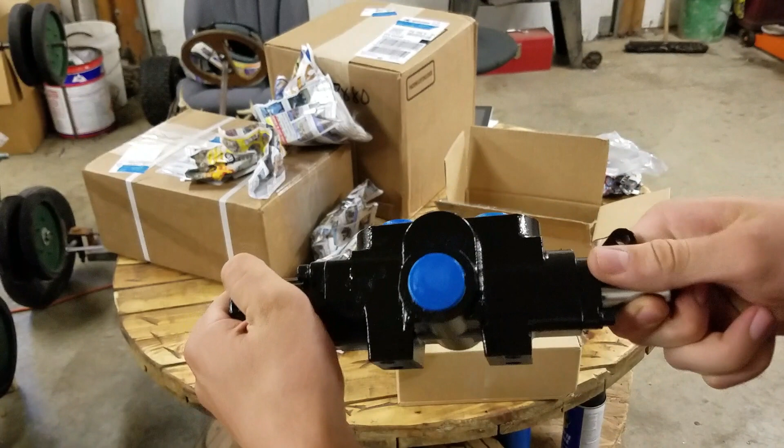Alright, so this is the valve here. I don't know exactly what all these ports do, I'll figure that out, but I do believe this has a relief set into it.

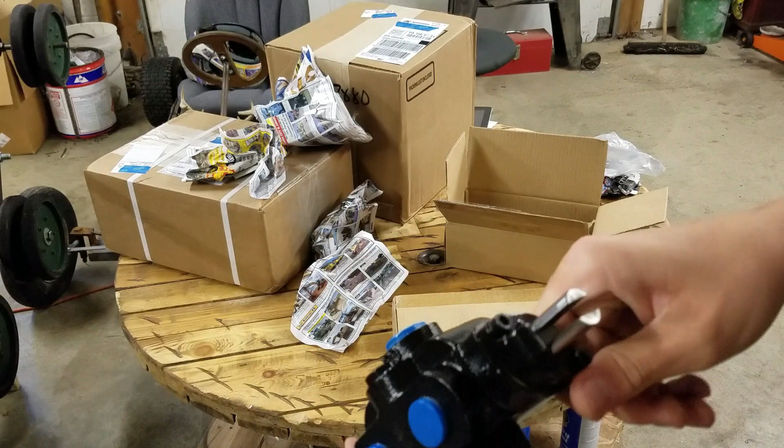So that's the valve, I've got two of those. They'll control the direction of flow of the hydraulic fluid to the motors from the pump.

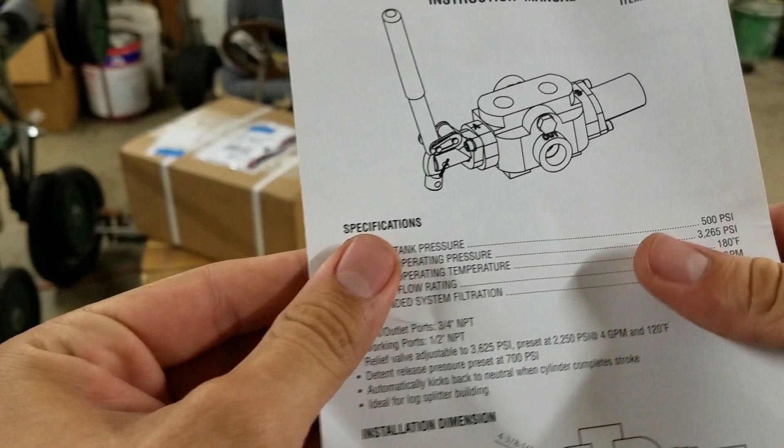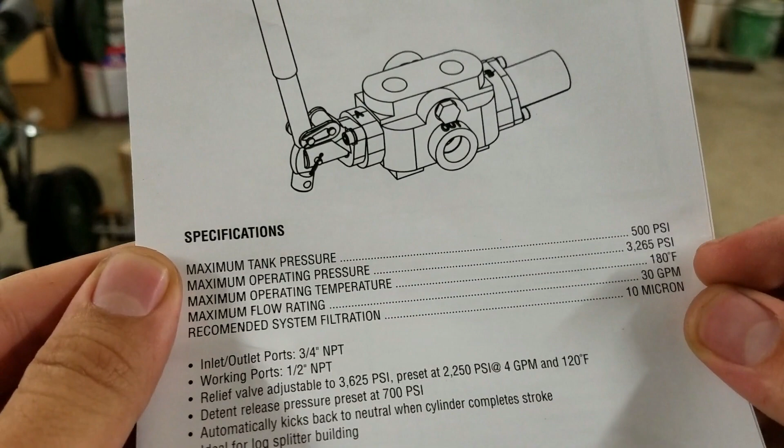Just looking over the sheet that came with the valves, some of the specifications here: maximum operating pressure is 3200 psi, temperature 180 degrees Fahrenheit, maximum flow 30 gallons per minute.

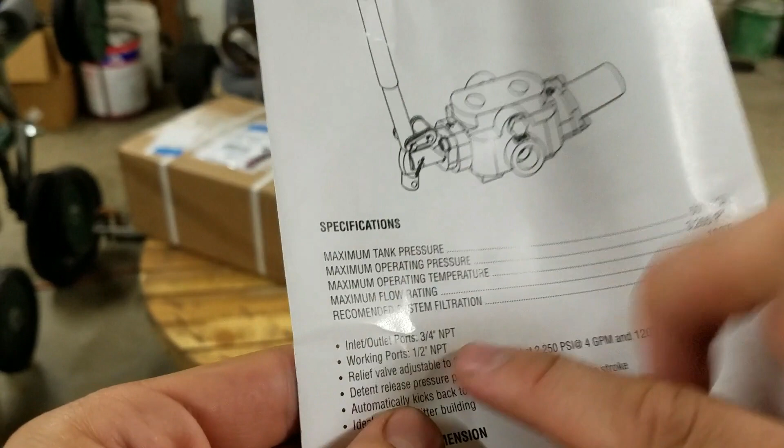That's the filtration. Inlet and outlet ports are 3/4 inch NPT, working ports 1/2 inch NPT. It does have a relief valve in it, adjustable to 3600 psi.

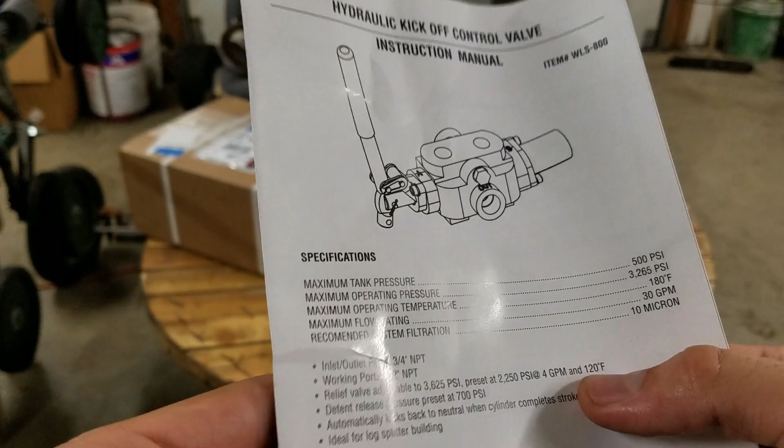It's preset at 2250, at 4 GPM and 120 whatever. So those are the details of this. Just wanted to show you that.

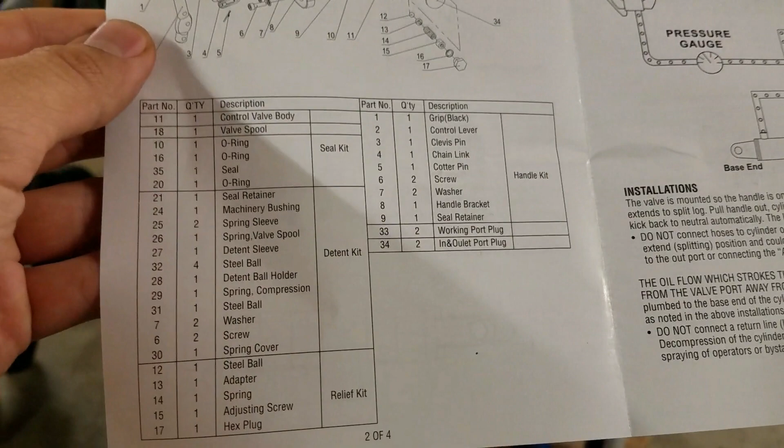Alright, on to the pump. That's this big one here.

Now, the pump I got is from Northern Tool Company. It's 1.8 cubic inch displacement.

It also has a maximum... actually, I'll show you all the things. Nice, gives you a nice little catalog. There's Northern Tool, that's the company it's from.

Here we go. Oh, this is heavy. Alright, here's the pump. This is extremely heavy, I'm gonna set this down.

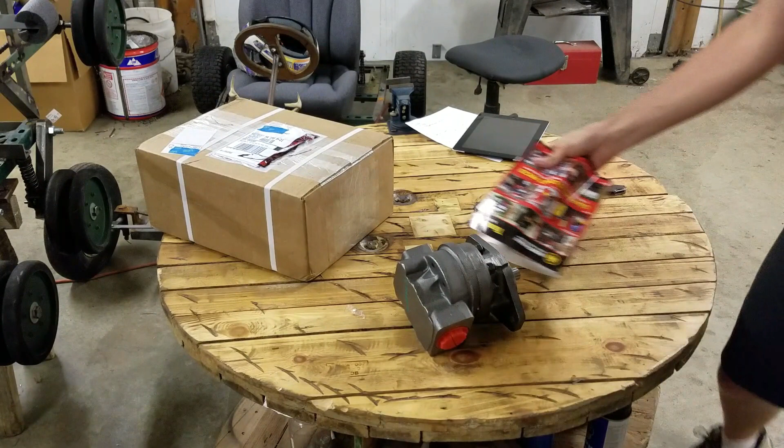Alright, I have some specifications here, let's bring them up real quick. So this is the pump on the Northern Tool catalog.

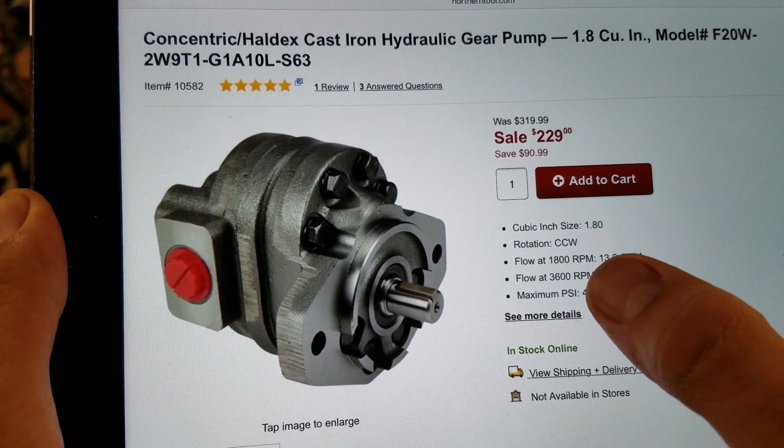Down here we see 1.8 cubic inch, counterclockwise rotation. It shows the GPM according to the flow: at 1800 RPM, 13.9 GPM; at 3600 RPM, 27.8 GPM.

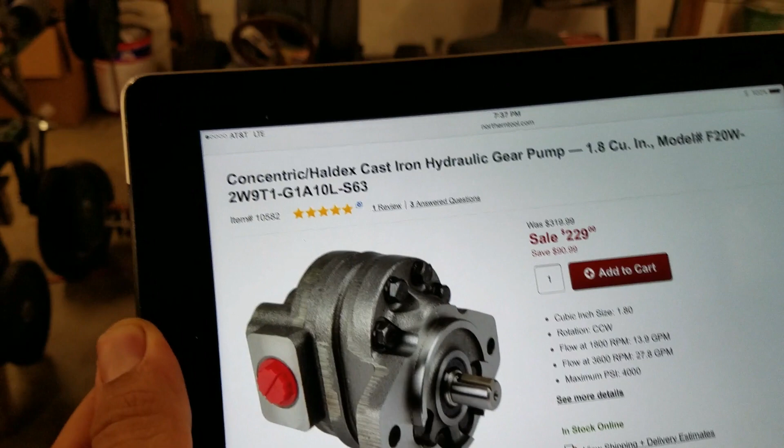So you can adjust the GPM with the RPM you put into it. 4,000 max PSI. There's the item number, 10582.

That's mostly it. Those are just the specs for it.

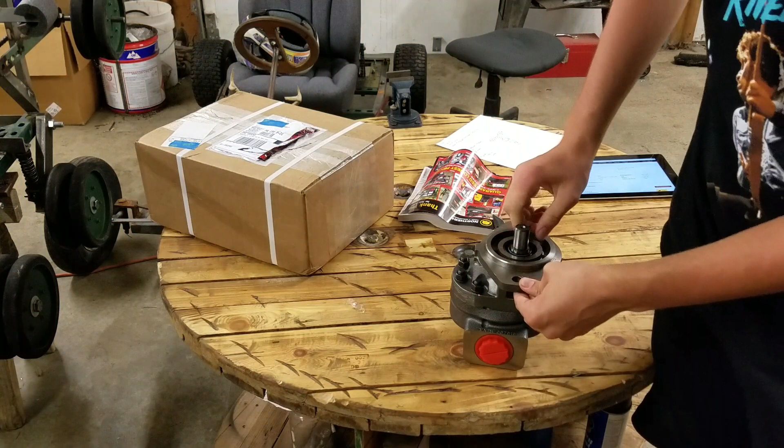So this is a really nice pump. Looks good. I don't know what else to really say about this.

But it looks nice. Now on to the motors, last but certainly not least.

And these motors here are from globalindustrial.com. I'll show you the specs here in a minute, right after I take these out.

I'll just take out one here to show you.

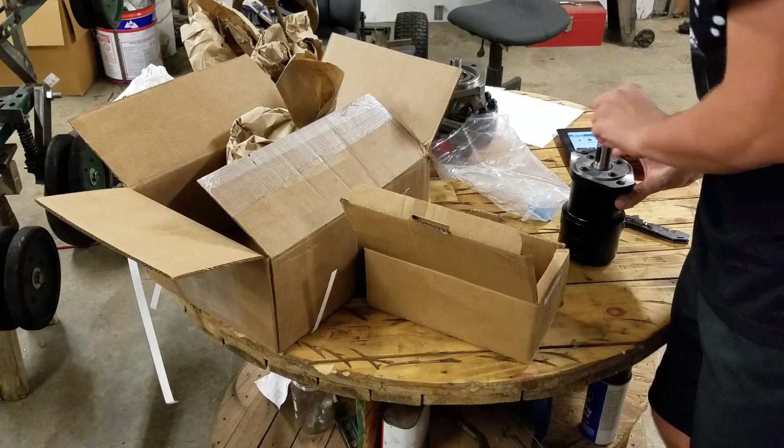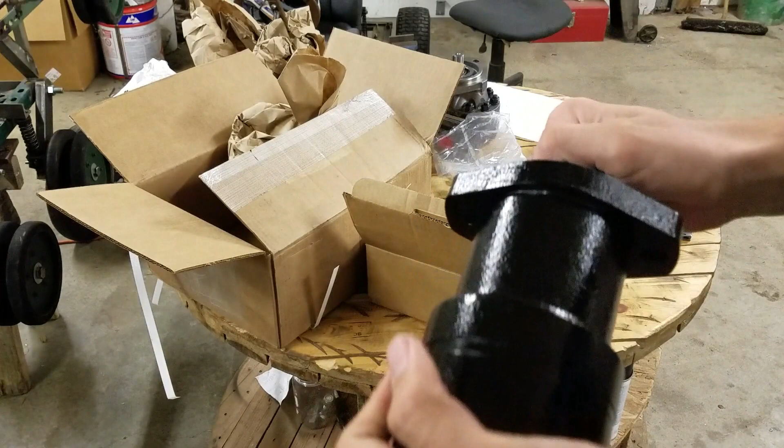Alright, so here we go, this is the motor right here. Got two of these. Really nice, let me get the specs here for you.

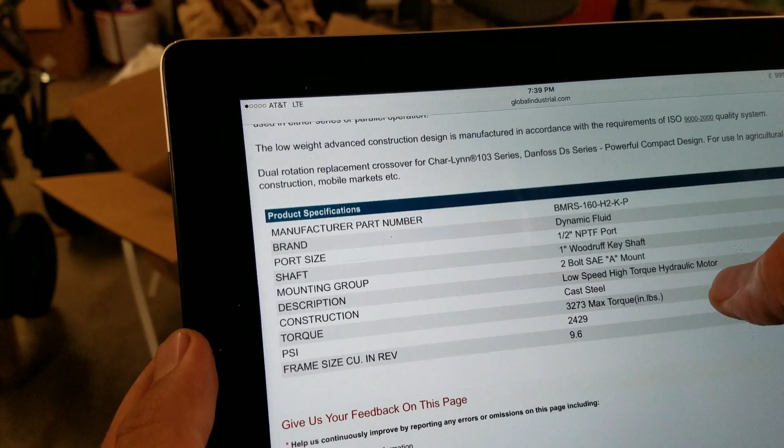9.6 cubic inch displacement per revolution, maximum torque of 3,200 inch-pounds, cast steel.

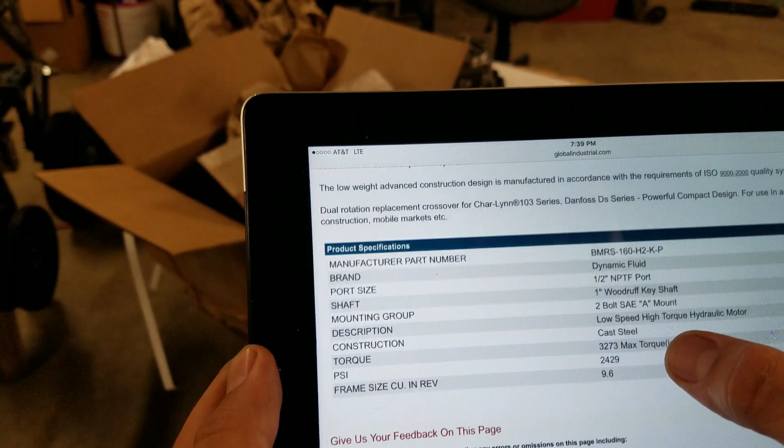Then I have some more specifics to what I'm going to be doing with it. So I'm going to be running it at about 2,300 psi and 7.3 GPM, and that'll give me 292 foot-pounds of torque.

That's the estimation of the torque output I'll be getting from each one of these motors. These look really nice too, they should work extremely well, hopefully, for what I'm doing.

So those are the parts there, all unboxed: the motors, pump, and valves. Now I'm going to take you over here to the tank and show you the general layout of what I'm planning to do with everything for the drive system.

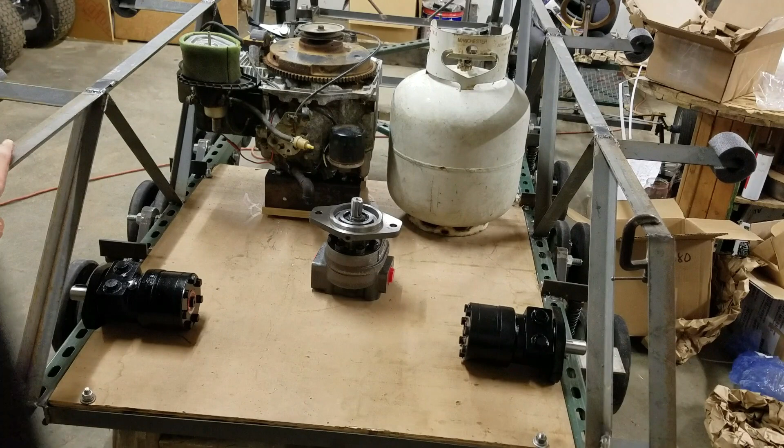Alright, so I'm over here at the back of the tank now. We've got the engine up here. This propane tank that I'm planning to use for the hydraulic reservoir should be about 5 gallons or so, maybe 4, which should be a good enough size.

The motors out here will be mounted up on the side like this, driving each drive sprocket. Pump in the middle here, this will actually be upside down from the way it is now, with the pulley from the engine.

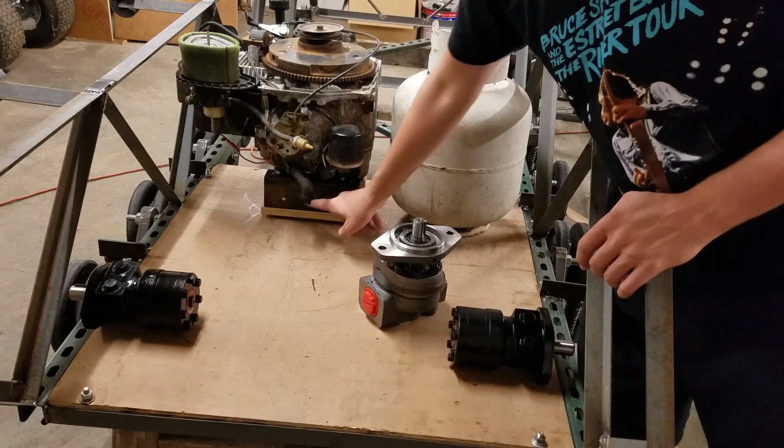As you can see, I need to redo these brackets here so that they're running this way instead of this way, because the way they are now, they're blocking where I'd need the belt coming here to drive the pump. So that'll be something I'll have to do.

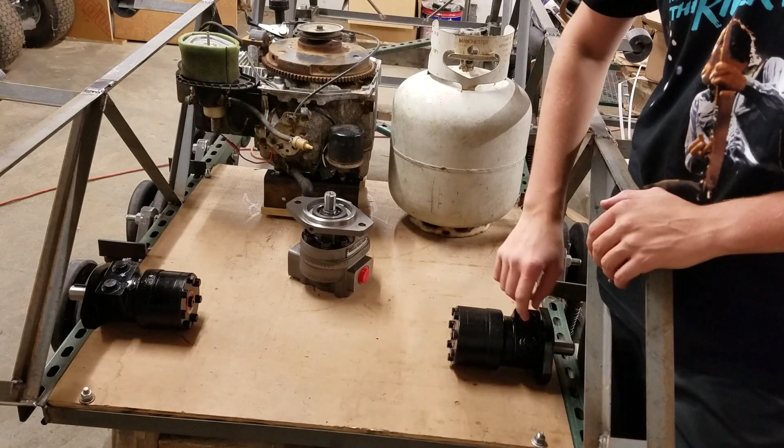So the engine drives the pump, which goes to the valves up front, which go back to control the direction of the flow to the motors. Then that will return back to here, to the tank, and so on.

And then I'll have the relief up there from the valves, to go in case I exceed a certain PSI, which I shouldn't, but just in case something goes wrong, that's good to have. A hydraulic filter in there somewhere on the return to the tank. I think that's it.

So now I can finally get to work on assembling the drive system. I need to get hydraulic hoses and a filter still.

So the next update might be a while, but it should be a bigger update than what I've been doing recently, because now I actually have somewhere to go.

I haven't been able to do much on this while I've been researching this stuff. All I've done was touch up a few welds here and there that I had to either fix or still do. So that's where I am now.